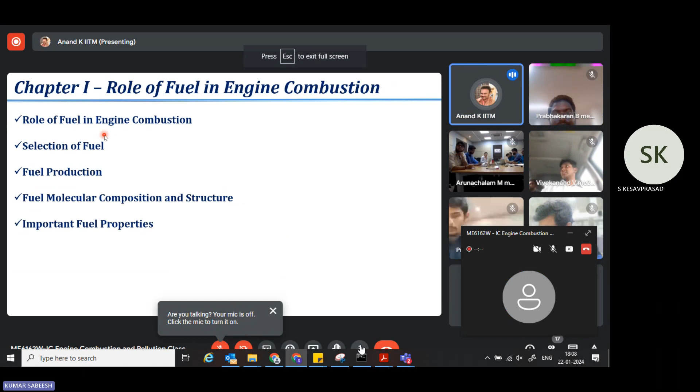Petrol is more of an informal way, so I use the term gasoline. Gasoline is a formal way of defining the fuel used in spark ignited engines, and diesel is a fuel that we use in compression ignited engines. Almost 95% of the total demand for the transport sector is met only with these two fuels.

So it means these two fuels possess some significant, distinct characteristics which make them unreplaceable by any other fuel. So here I will highlight what these fuels possess which makes them unreplaceable, and they have been used for around 100 years now. Okay, these liquid fuels are produced from crude oil.

Now, from the combustion perspective, we need to understand the molecular composition and molecular structure of these two fuels. Although we use these two fuels in our vehicles, we pay very little attention to the molecular composition of the fuel and the molecular structure of the components present in it. But from the combustion perspective, it is very important to know about that. So I'll spend time discussing the molecular composition and molecular structure.

Before that, I will briefly discuss how gasoline and diesel are produced from crude oil in a typical refinery plant. It's very important to track the origin of these two fuels to understand the composition. Of course, you know that the molecular composition of any fuel depends on the source from which the fuel is produced. So we will briefly discuss how crude oil gets converted to gasoline and diesel, and then we'll discuss the molecular composition of these two fuels from the combustion perspective.

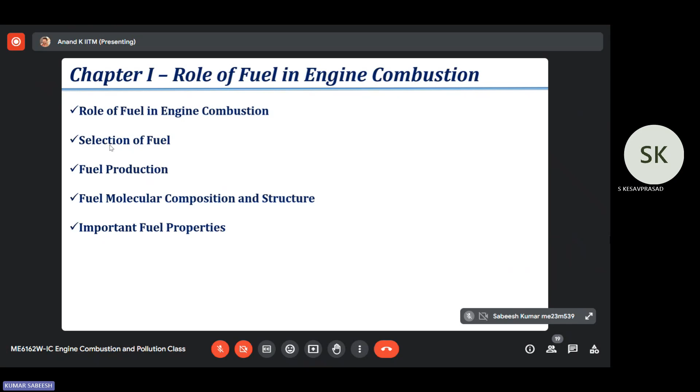I'll close this chapter with a brief discussion on the important properties that are relevant for spark ignited and compression ignited applications. Okay, so these are the contents we are going to discuss in this first chapter on the role of fuel in engine combustion. Before I start, I will briefly introduce the topic with a discussion on the parameters that affect the performance of an IC engine and the pollutants that are formed in an IC engine.

So you are also doing research on engines, you work in the automotive industry. Whenever we do research on engines, there are two primary targets. One is to improve internal combustion engine performance, and the other one is to reduce the pollutants. From the end user perspective, people are bothered only about performance, primarily mileage. We want more mileage before we choose a vehicle for a given application.

Performance, as you know, depends on how much power or torque is produced with how much fuel is consumed, and we want a minimum quantity of fuel to be consumed to generate a given power and torque. That is what we define as better performance. The other important thing is pollutants. We want to minimize the pollutants that are emitted from the tailpipe of the engine.

This is important not from the end user perspective, because a user of a vehicle is never worried about how much pollutant is emitted from the tailpipe. But for the OEM, it's a major worry because there is a legal requirement. Any new vehicle cannot be launched in the market unless the criteria pollutants comply with the current norms. There are legal norms in all countries across the globe. In India, we have our own legal norm, the emission standard.

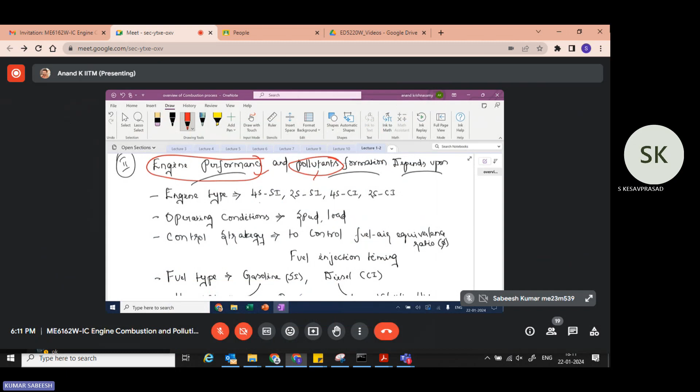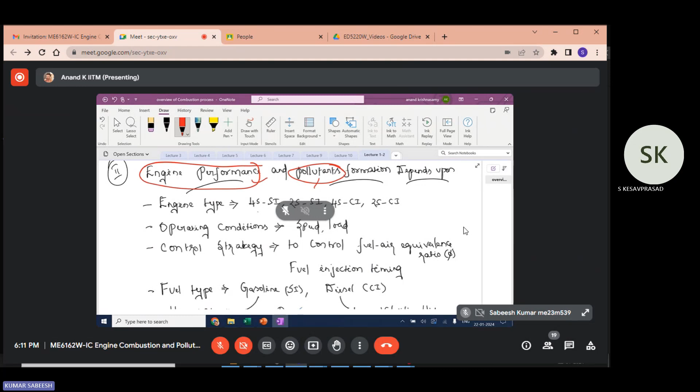From April 2020, we are following BS6. We have actually jumped from BS4 to BS6. So tremendous technology, time and investment has been spent to reduce the criteria pollutants. Pollutants, as you know, are an outcome of the combustion phenomena that happen in the engine. So from the OEM perspective, the pollutants need to be minimized. Only then can the vehicle be launched in the market.

So these are the two primary targets: maximum performance with minimal pollutant emission. For an IC engine, these two depend upon four factors: the type of engine that we use, operating conditions, the control strategy that is adopted, and last but not least, the type of fuel that is used in the engine.

So these four are the deciding factors. These four factors affect or influence performance of an IC engine and pollutants that are formed from an IC engine. So what do you mean by engine type? So here I am talking about reciprocating engine, internal combustion engine. I already said that from a combustion perspective, you have two categories. One is external combustion, other one is internal combustion. Gas turbine or steam turbines are external combustion based engines. So here we have internal combustion engine.

In internal combustion, you have two options. One is reciprocating, other one is rotary engine. Rotary engines have very limited application. Wankel engines are used in race cars. They run at a very high RPM. Of course, there are limitations in the design. The primary limitation is the leakage. Because of that, it's not commercially successful like a reciprocating engine design. So what category of engine? The engines that we use are predominantly reciprocating engines.

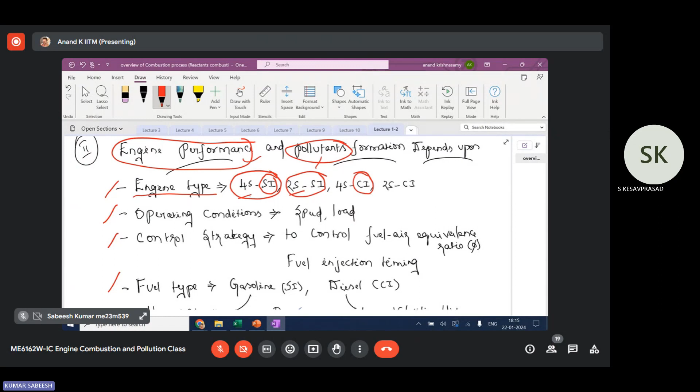So this 2-stroke is the most compact and low cost. The reason why it was earlier popular was its cost is very low because of simple design. And now it is almost discarded in the motorcycle segment, primarily because of the mileage. So you know what is the typical mileage given by 2-stroke spark ignited engine and a 4-stroke spark ignited engine. 2-stroke, it's well below 40 km per liter. Mileage is the fuel that is consumed to cover a given distance.

So 2-stroke engine has been taken over by 4-stroke primarily because 2-stroke engines are known to produce very low mileage. From the end user perspective, they want higher mileage, because it involves maintenance cost, fuel cost. So 4-stroke spark ignited engines are predominantly used in motorcycle as well as passenger car segment. 2-stroke is still used in very limited applications like motor boats, lawn mowers, very small engines, and some off-road applications currently.

Then you have this 4-stroke compression ignited engine. It's the most versatile IC engine available today. You can design a 4-stroke compression ignited engine with 3 kilowatt rated power. You can also design a 4-stroke compression ignited engine with 30,000 kilowatt power. You have a wide range of power rating in this category. That's why it is the most versatile IC engine available today. So you can design a very small engine as well as a very large engine.

Where do you come across this 30,000 kilowatt? Generator, sir. Generator, and power plant applications like a standalone power plant. Any other engine in mobile application? Ship industry, sir. Ship is 2-stroke, not 4-stroke. These 30,000 or 20,000 kilowatt engines are locomotive engines, rail engines, right?

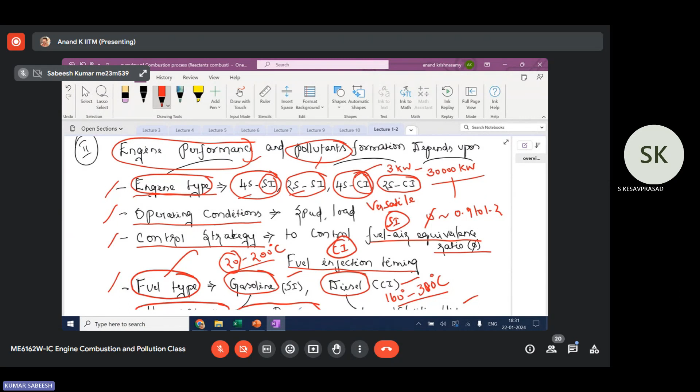In the first module, we are going to discuss the combustion phenomena in the 2 engines, primarily with the focus of understanding the factors that help us to control the combustion. We want a progressive or controlled combustion so as to improve the performance and pollutant formation. If you have uncontrolled combustion like a bomb blast, it is of no use. Thermal energy is released without any time, and you cannot convert the thermal energy into useful work.

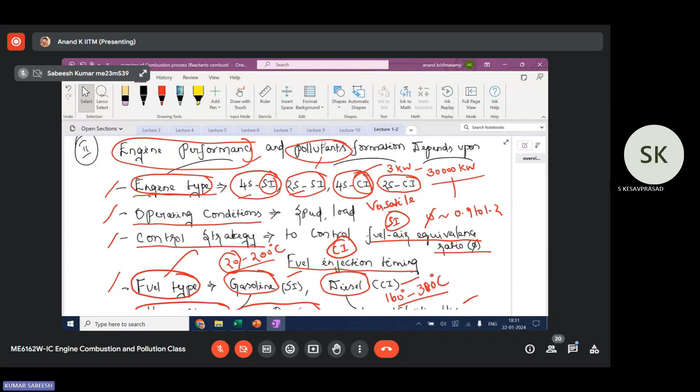So we want a progressive, more controlled combustion. That is what is going to improve the performance of the engine. It also decides the concentration of pollutants emitted from the engine. So the combustion process is central to engine performance and pollutant formation, which are dependent on these 4 factors.

So here I have provided an overview of the combustion process. In an internal combustion engine, fuel and air react and form various products. Out of these, some are designated as pollutants. When an IC engine powered vehicle moves on a road, the combustion releases various species into the surrounding ambience. This is where the objection comes in, because these species released are nothing but products of combustion.

Now some of these, 4 of the species are designated as criteria pollutants. What are those? Unburned hydrocarbon, carbon monoxide, oxides of nitrogen, and particulate matter. We are going to discuss these 4 species in detail in the second module. These are pollutants emitted due to the combustion event in the engine. Our focus is on these 4 species because these are called criteria pollutants or regulated pollutants.

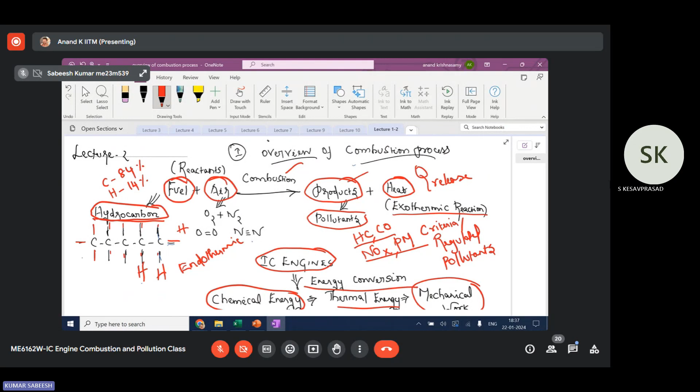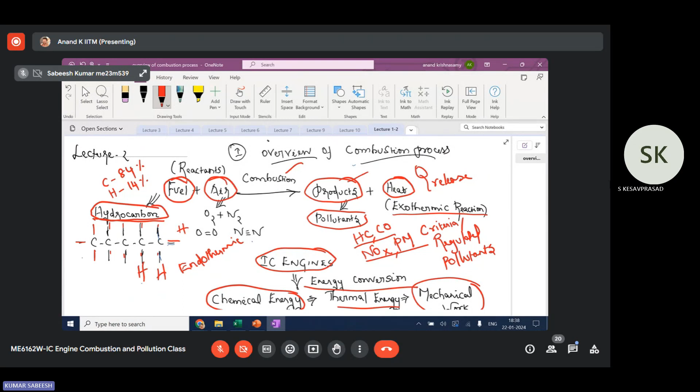Looking more closely, these are elements, and they form a compound. To form a compound from an element, there is some energy already spent. What is that energy? That is potential energy, sir. Have you come across this term, enthalpy of formation? Yes, enthalpy of formation, sir. Yes, enthalpy of formation. To form a compound from elements, carbon and hydrogen are elements. So we are talking about hydrocarbon fuel.

Not able to get. Sorry, sir. No, I was talking here. Can you please close the mic if you are not talking?

Okay, so we are talking about hydrocarbon fuel. Carbon and hydrogen are connected through these bonds. To form a compound from an element, there is some energy that is already spent. You know, energy cannot be created, right? That is the law of conservation of energy. Energy cannot be created, but one form of energy can be converted into another form of energy.

Now, here we have hydrocarbon fuel, which consists primarily of carbon and hydrogen, which are elements. To form a compound from these elements, some energy is already spent. That energy is nothing but enthalpy of formation. During a combustion reaction, which is an exothermic reaction, the energy the fuel possesses is chemical energy, which is nothing but enthalpy of formation, which is how we quantify it, right?

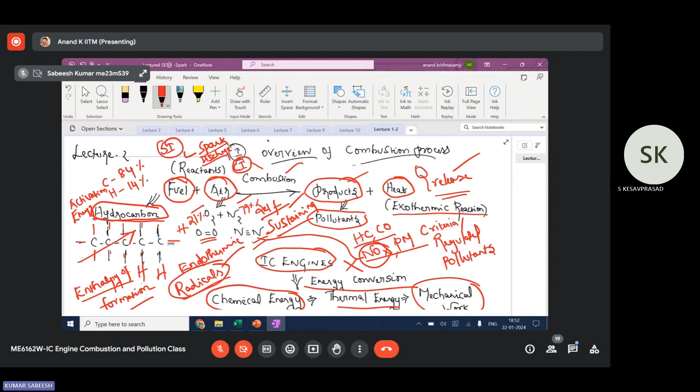Sir, regarding reactivity, as you mentioned, the introduction of radicals is what defines the reactivity, correct? So if it is highly reactive, that means the molecules can be reacted by these radicals easily. Is that correct, sir? When I say highly reactive, it means the radical forming tendency is higher. It can quickly form radicals, meaning it will get into ignition quickly. When I say low reactivity, it won't ignite readily. It won't form radicals quickly, because of the stability of the molecular structure. Okay, clear, sir. Thank you, sir.